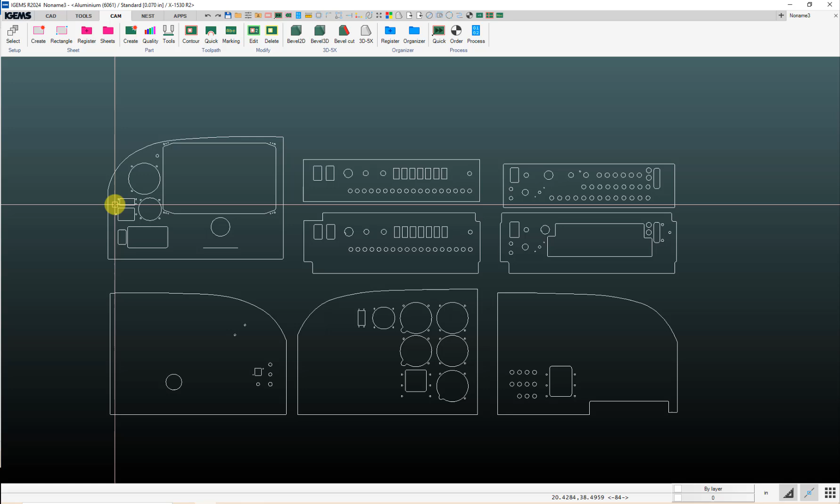Depending on the application, you might be okay in certain areas of your part going fast and having a rough edge and more taper, whereas other areas of the part, smaller holes, finer details, you might want to go slower. And by doing that, you can optimize your cost per part. So we've got some parts here that we can play around with, the different features within the quality command. I'll go ahead and create some parts here.

And this part has a slit that we need to cut, which is considered an other object. We'll go ahead and do other objects. I can either click directly on that line, or I can just drag a box around everything. It'll find what it didn't find last time. Hit enter, and now that line shows up in my preview window.

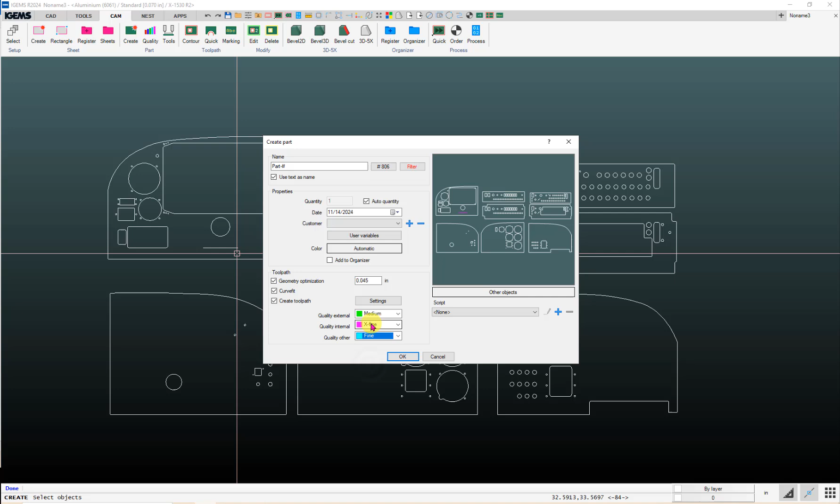Down here we can specify what we want for default qualities for outside cuts, inside cuts, and those other objects. I'm going to change that to fine for the fun of it. And we'll click on OK. We've got our parts in our toolpath now. We can go up to our quality command.

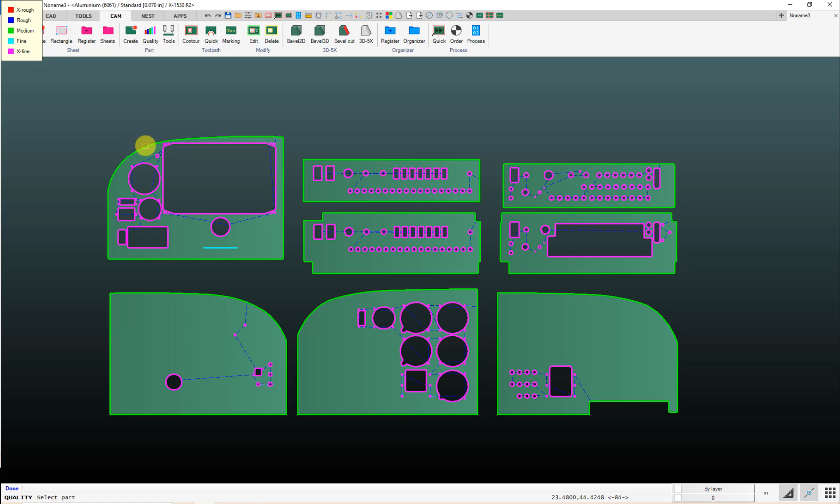So when you first start this, up here in the top left hand corner, you have this roadmap that lets you know what the different colors mean. So the magenta for your extra fine quality, green for your medium, red extra rough. If you want to change quality, you can click on a part, so somewhere on the perimeter of a contour, and bring up this box here.

If we want to change quality on, say, this big opening here, paint command is the easiest way to do something like that. First of all, select the quality that you want to use, click on paint, and it's going to prompt you to specify start. So there's a little dotted line that's going to the closest cut. If I move my mouse out this way, then you see that dotted line is now going to the outside cut.

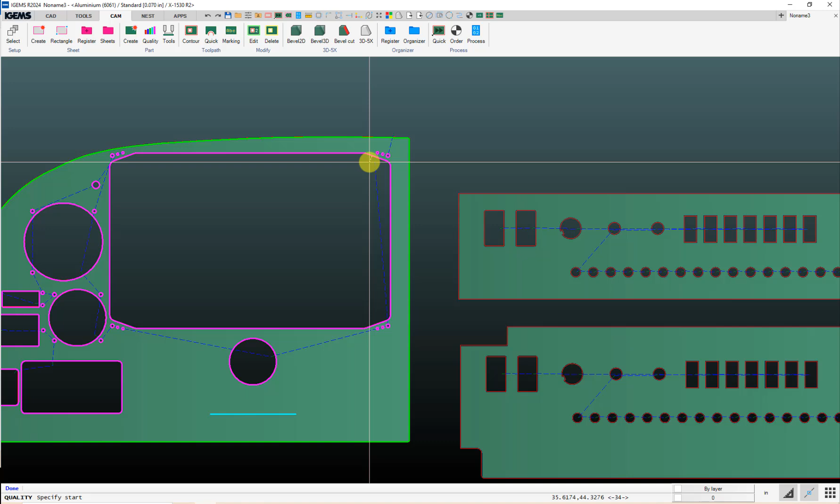When that dotted line is basically attached to the cut that you want to apply this quality to, if you want to apply it to the entire geometry, that entire cut, double click, and now that entire cut has the medium quality. If you only want to apply that to a portion of a cut, you give it 2 distinct clicks. And you don't have to be right on a snap point.

If I wanted to apply this quality from here, left click there, and then over here somewhere, left click, and then it wants to know which portion of this cut that you want to apply that quality to, because it can either apply it to this side of it or that side. So if I want to apply it to that portion of the cut, left click, and then when I'm done I can hit enter.

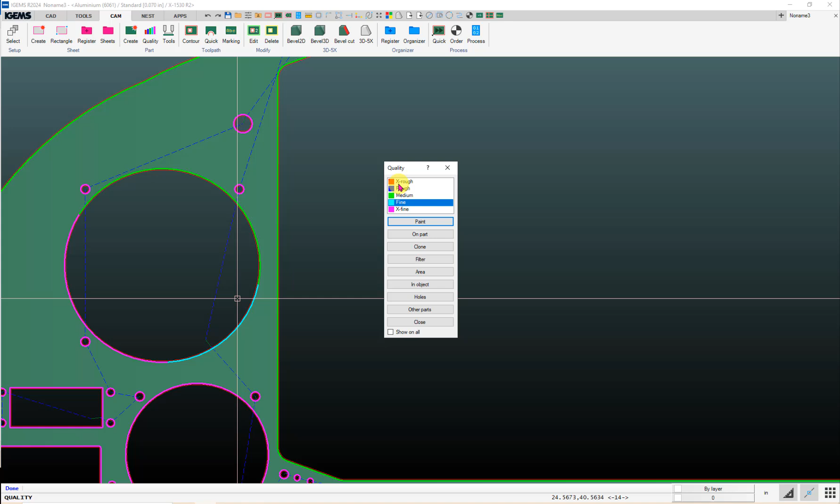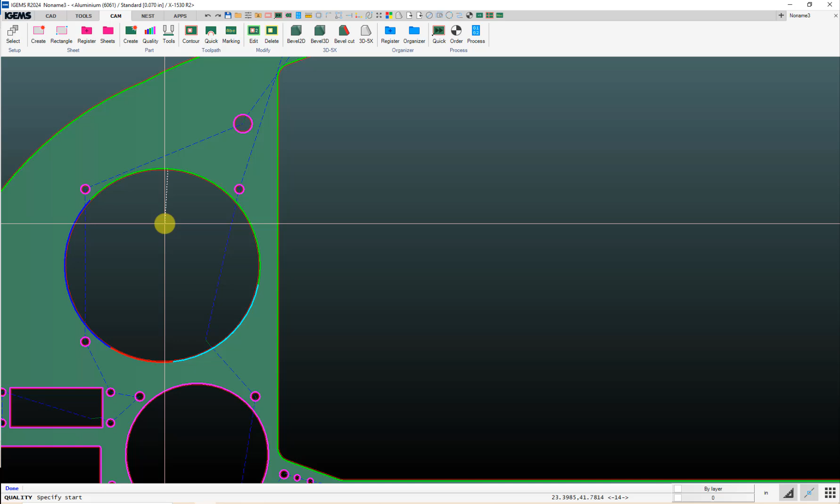With that, if you wanted to, you could have up to 5 different qualities on a cut if that were what you're going for. Just left click, and then left click to indicate the portion of the cut that you want to apply it to. Let's put that all back to medium. So we'll go back to medium, paint, and double click. And enter gets you back here.

On part will apply the selected quality to the entire part. If I want this entire part to be medium, click on part, and it's all medium now. Clone lets you copy qualities from one cut to identical cuts. We'll do that on one of these other parts, so we'll come back to that one.

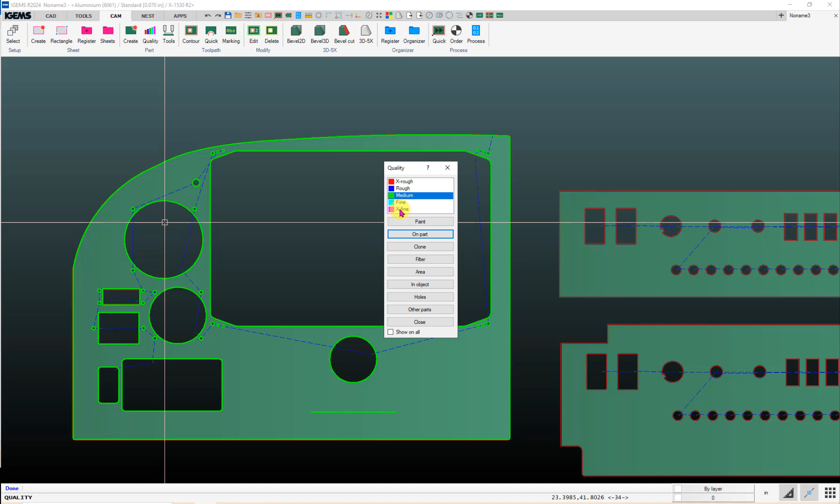Filter allows you to filter out identical geometries to apply a quality to. So if I choose, say, fine, and I do filter, you can use this on basically any line or arc segment. As you hover around the part, it'll highlight segments.

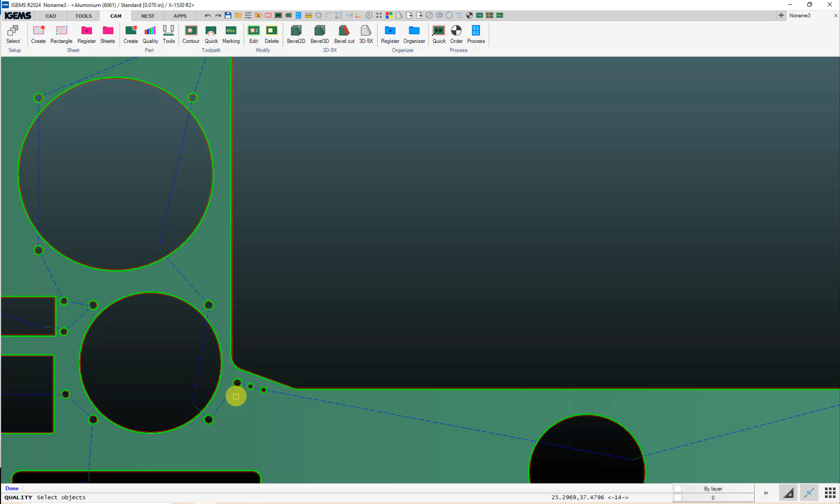If I wanted to apply this quality to all arcs that had the same radius, when that's highlighted yellow, left click, and then down at the bottom it prompts you to select objects, and you can drag a box around the entire part, and if it finds any matching radii like that, it'll apply that quality. So if we zoom in here, we can see there that it applied that.

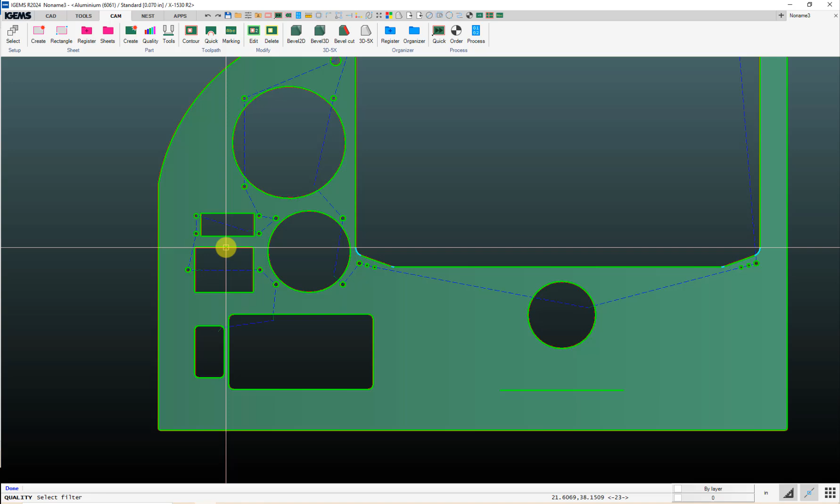So choose the quality, choose filter, hover near a segment that you want to apply it to, left click, and then you can just drag a box around everything. It'll find the identical copies.

Area allows you to drag a rubber band around areas where you want to apply quality. We click area, and then down here at the bottom it prompts you to specify point. So you can just left click and create this rubber band around an area, and when you've got that area enclosed, left click and then enter, and anything within that rubber band gets that quality.

This will work even going across portions of a cut. So if I do something like this, then anything within that rubber band gets that quality.

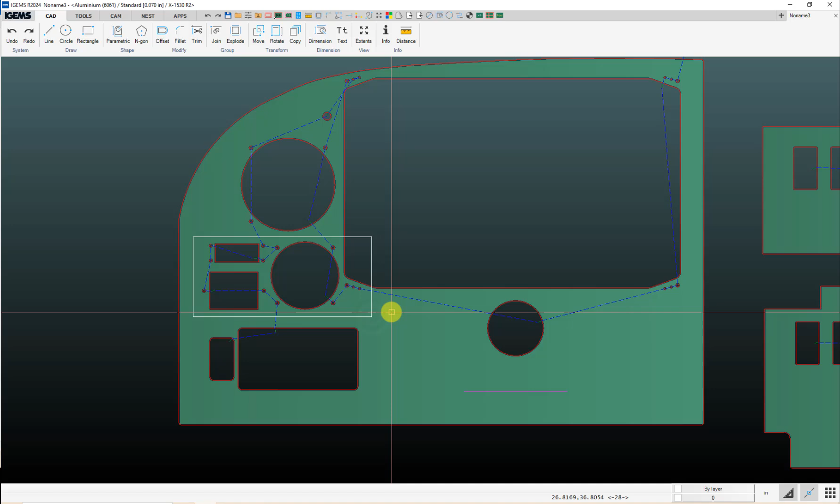In object will use CAD geometry that you've got drawn to apply quality. So I don't have anything drawn right now. Let me just close this and let's just draw a rectangle around an area. And let's go back into our quality command. Click somewhere on one of these cuts, choose a quality, choose in object, it prompts you to select object, and anything within that object gets that quality.

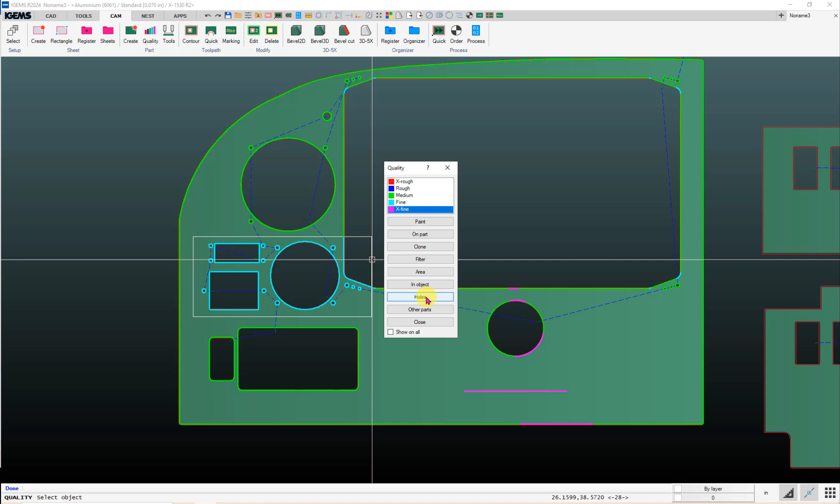Holes is similar to filter, and it can be used on either round holes or really any closed geometry. Let's go extra fine, choose holes, and as you again hover your mouse around, it'll highlight different geometries that you can select from. If I want to do all holes of this diameter, when that's highlighted yellow, left click, and then it prompts us to select objects. So we left click, drag a box around everything, and it'll find holes of that same diameter.

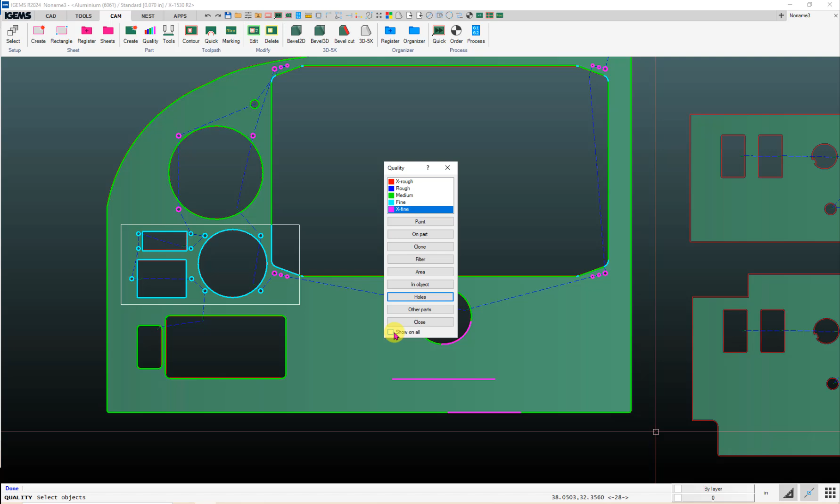Other parts allows you to apply a quality to one of the other parts that's in the drawing area. And probably a good time to mention this show on all checkbox down here. If I check this, then it'll show me what the quality is on the other parts that I've got here.

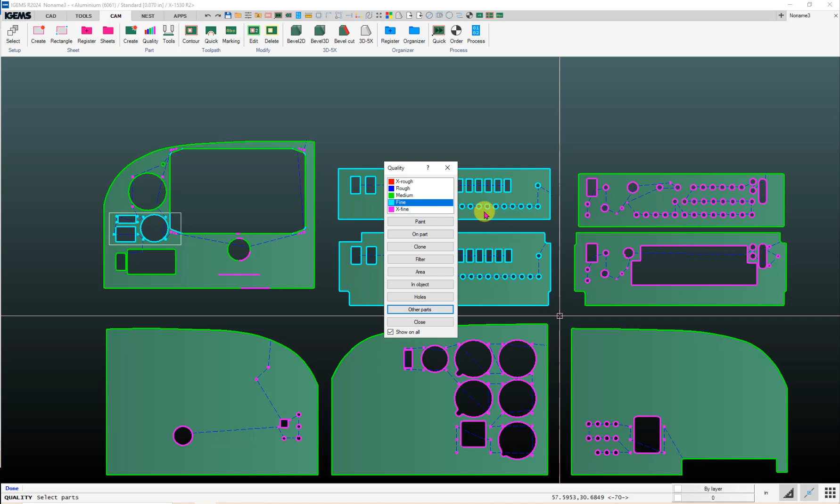If I wanted to apply the fine quality to another part, click on other parts, choose the part or parts, hit enter, and that gets applied to the entire part. So this command only allows you to apply that quality to the entire part. You can, however, close out and then go back into the quality command if you want to make further changes to one of those parts, which we'll do here in a moment. Because the next thing we have here is clone.

So let's take a look at that holes command on one of these other parts here. Quality, we'll go ahead and edit this. First of all, holes command. As I mentioned earlier, we can use that on things that aren't circles. For these rectangles here, we want a different quality. Choose the quality, choose the holes option, highlight the geometry, left click, and then drag a box around it and enter, and it finds those matching copies.

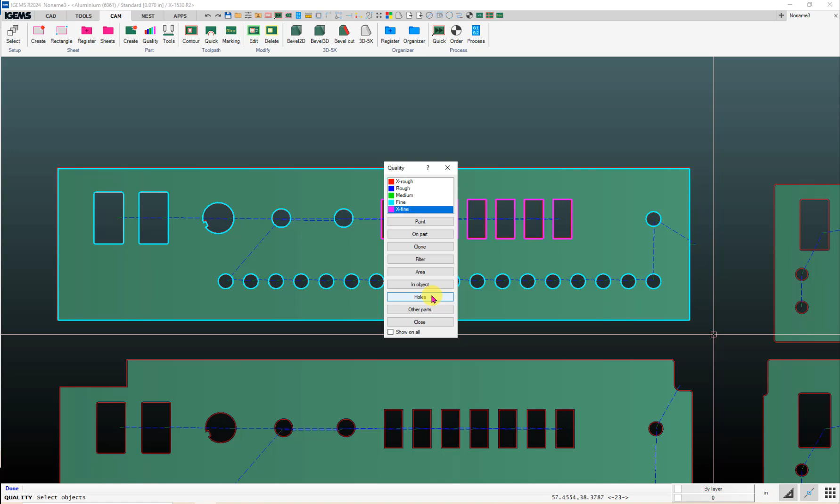One other note on that holes command is if you don't specify a filter and you drag a box around everything, it'll do all of the openings. If I do holes, select filter, rather than highlighting and left clicking, if we just hit enter or done and then drag a box around everything, then all of the inside cuts get that quality.

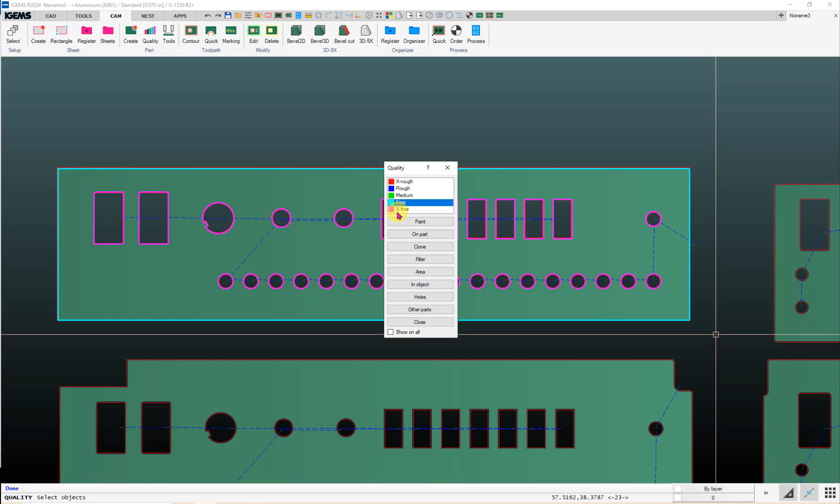And then finally we'll come back to the clone command on these holes here. Let's say for example we wanted to do half of it as fine, the other half as extra fine for whatever reason. We will first paint that on here somewhere and then left click, enter. Rather than having to do that umpteen times, I can use my clone command, select filter when that's highlighted, left click, and then drag a box, and then enter.

So that's the quality command.